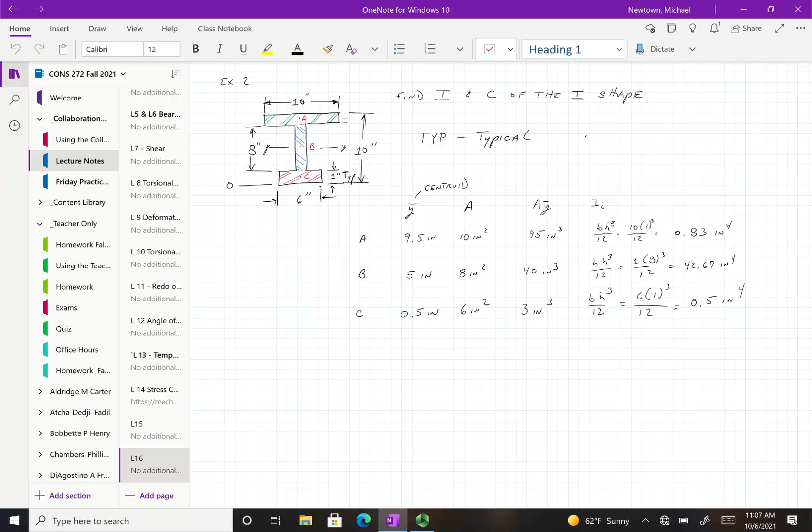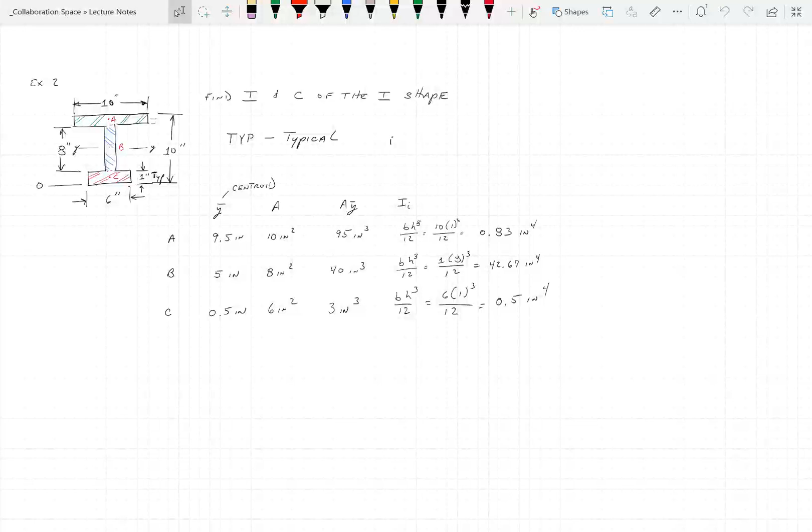All right, I knew there was another column I was missing. We want an A showing up here, A times D squared.

So our area times the distance is actually the height here. What we're looking for is these are the D's, each section here.

That will be the D, okay? Because we're looking for the height of the change from where the centroid is going to be. And we can do this down in the equation, or we can do it up here. Matters not, but it's going to be a little easier because you got your A over here and your D. So it's a matter of taking A, the 10 by 1 is 10, and the height of that whole thing is 1 also.

Okay, did I do that right? I did do that right.

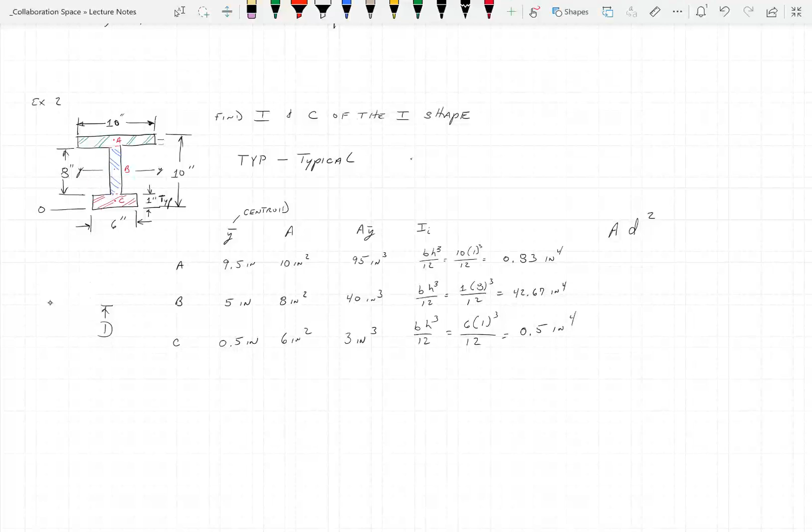No, I'm not doing that right. Okay, let me back up here. Sorry, I'll get my head back in this game and we'll go from where we're supposed to be. The D that I'm looking for is from the, zoom in on this for a minute. Let's try a different color here. Which haven't we used? Let's use blue, we haven't used blue.

So I'm trying to figure out where it is from where our baseline is here, okay? So our D for this one, C, will be D of C will be 0.5 inch, and D of B will be 1 and 4 is 5 inches. And then D of A will be 9.5, yeah, because it's...

Okay? And what that is, it locates the centroid of each object with its area relationship to where the baseline is. Okay, so the bottom is 0, we called it, but we could call it any place else.

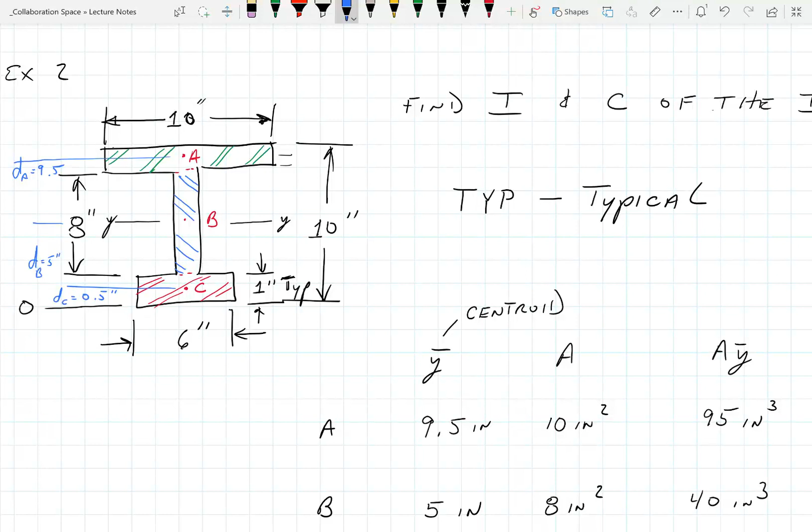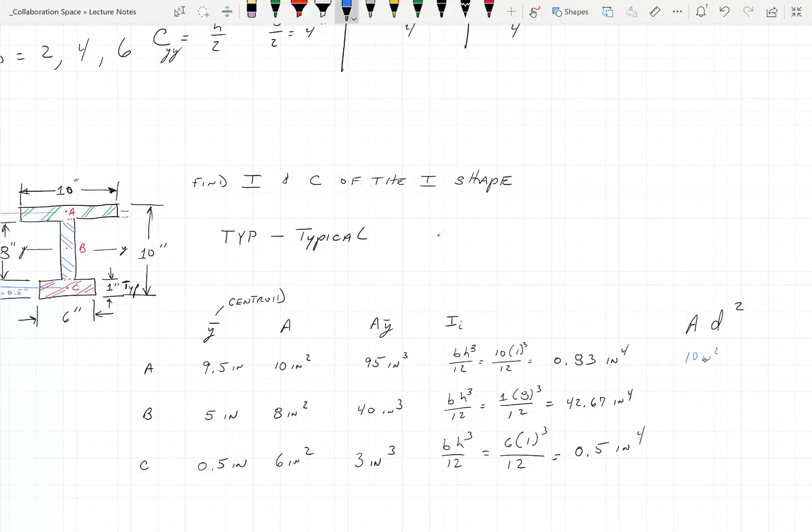All right, now I think we're good. Yes? Okay, so literally over here to this last column, AD squared is now going to be A, which is the top one, was... I'm going to do it mathematically here, so the 10 inches squared, let's write that so you can see it. So 10 inches squared is the area, and I'm multiplying it times 9.5 inches, and I'm squaring that, okay? So it's not 9.5 square inches, it's 9.5 inches squared.

Good, Fadil? Okay, all right, what's that number come out to? The one I got planned for today is a lot simpler than this. Hopefully, I just picked this one out of my hair, but should have known better. Complicated to get.

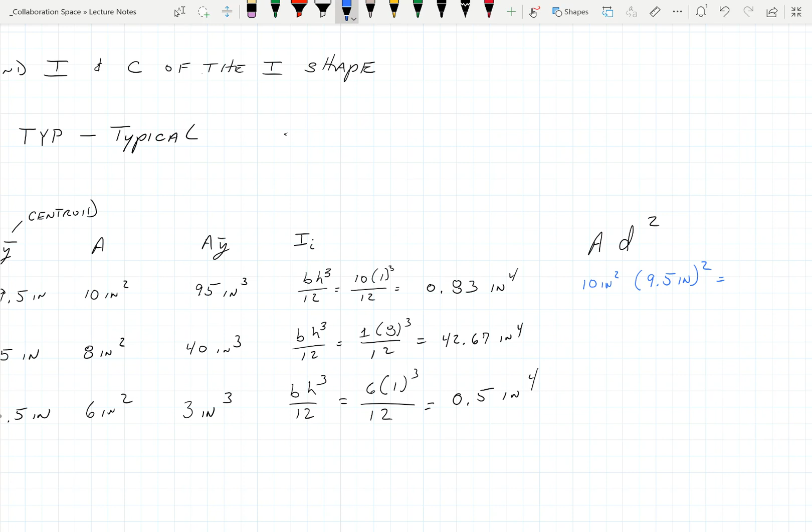Now, 9,025. 9,025 inches to the fourth. 902.5. Yeah, 902.5. I'd like 902.5 better.

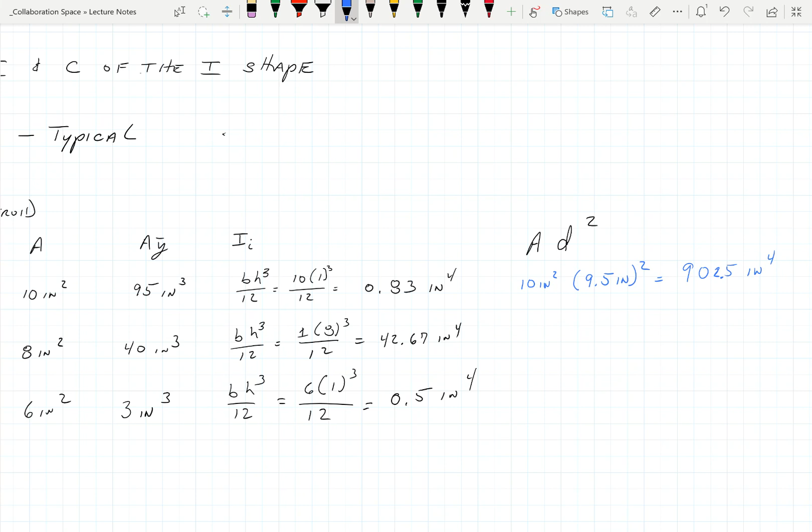Because 10 times, well, 9 would be 81, right? And that'd be, no, it'd be 810. And then you do the 0.5. Did you by chance just miss the 9.5, put it in as 95? I think you put 10 inches squared times 9.5. Yeah, oh, I did that.

So this, when you do this bit, folks, it's important that you keep the areas are already squared, and the D is something you're going to square, because we want it in inches to the fourth. All right, so let's try the next one here.

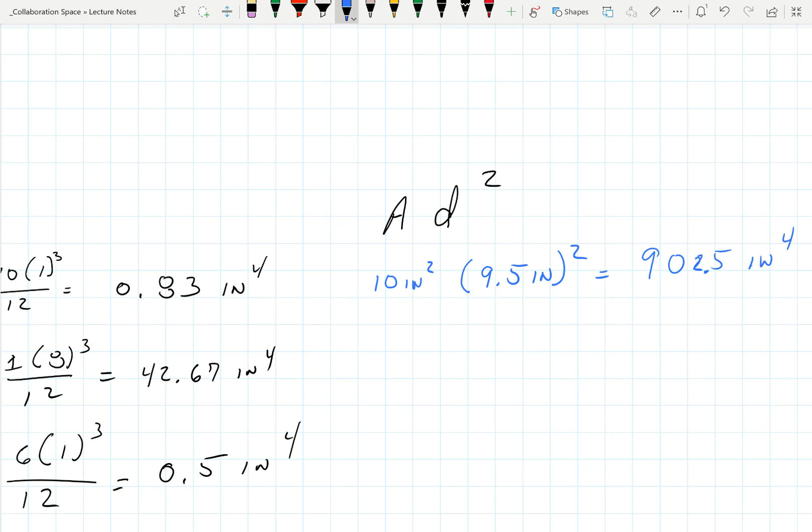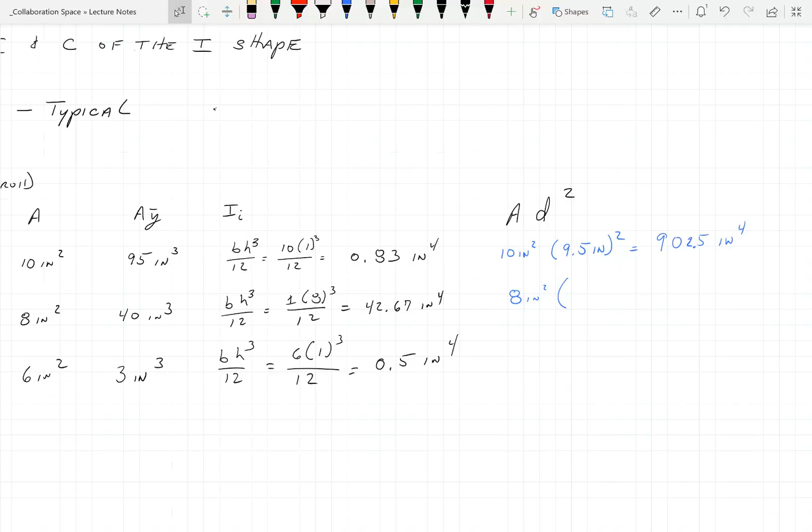So we got 8 inches, inches squared, and this came out to be 5 was the D. And we square that, so 25 times 8. 200.

Okay, and then our area for the bottom was 6, and we were at 0.5 inches squared. 1.5. 1.5? Okay. All right.

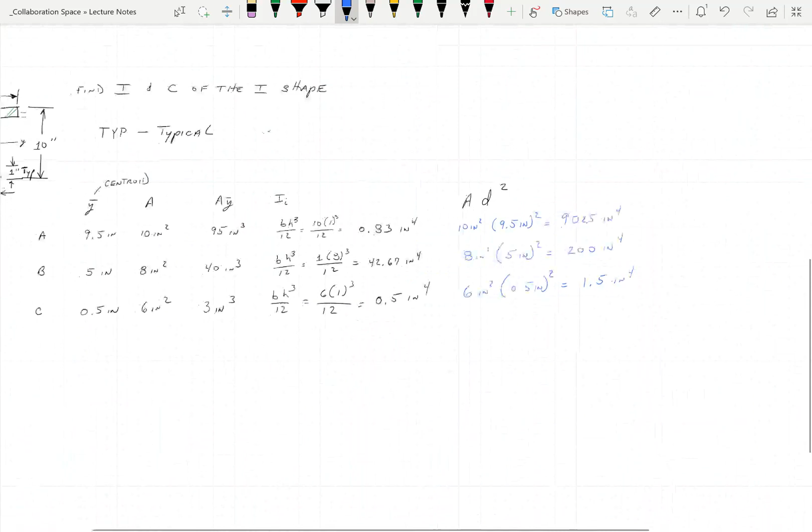Now, I'm doing this with all the places in the table, and I'm going to introduce you to the equation so you don't have to do these last two out this way. So it's your choice, okay? You can always tableize it, or you can just come down the list and do the equations, okay? But what we're looking for here is the I.

Oh, I'm sorry, before we do that, let's find the centroid. Find the centroid. This is the easier one of the two, okay? And this is going to be Y bar O is the label for it. Y bar O is going to be equal to the summation of the A Y bars divided by the summation of the A's. Yep, okay?

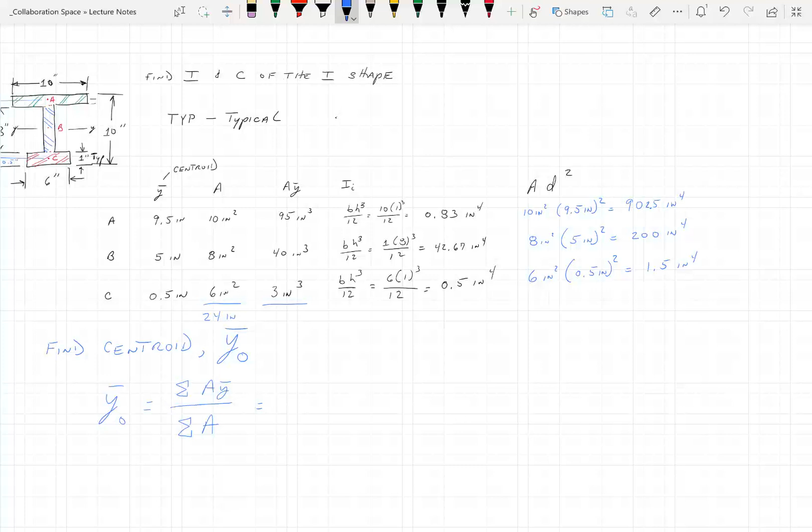And the summation of 95, 40, and 3 is? 138. Everybody agree? Hearing no dissenters, we're moving on.

138 inches cubed divided by 24 inches squared. I'm going to clean that up, make it look like an 8.

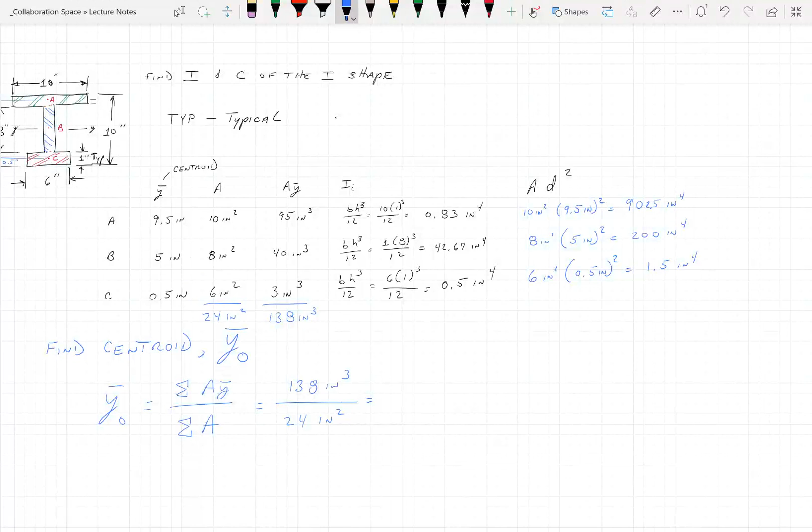What do we got for a number? 5.75 inches. Okay? Everybody good mathematically?

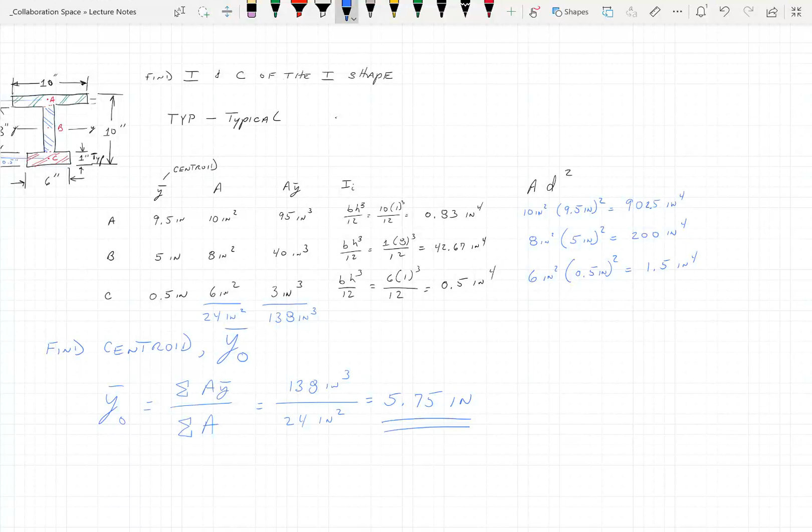Okay, now let me show you where that thing belongs. And I really do think I want a different color here. So let's try — yellow doesn't really work well.

Purple does. So we are 1 inch up here, so there's 1, 4 is 5.

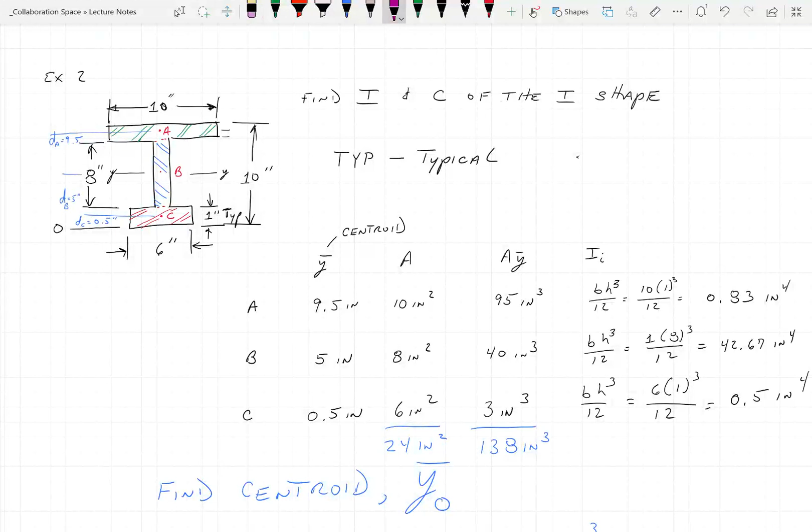But our centroid we just decided was 5.75, so we are literally right there.

Y bar is 5.75 inches. Make sense?

Okay, I want to ask you this to make sure it makes sense. I want you to understand, is it in the right place? What has more mass, the top of this thing or the bottom of this thing?

The top. So the centroid should shift towards the greater mass, right?

Sweet. One of the greatest things in physics — about the only tool I ever remember from physics.

Give or take, is that perfectly balanced? Is that where the centroid is? Yes, because there's all this extra weight out here. Now you take... yes, I know I can use this.

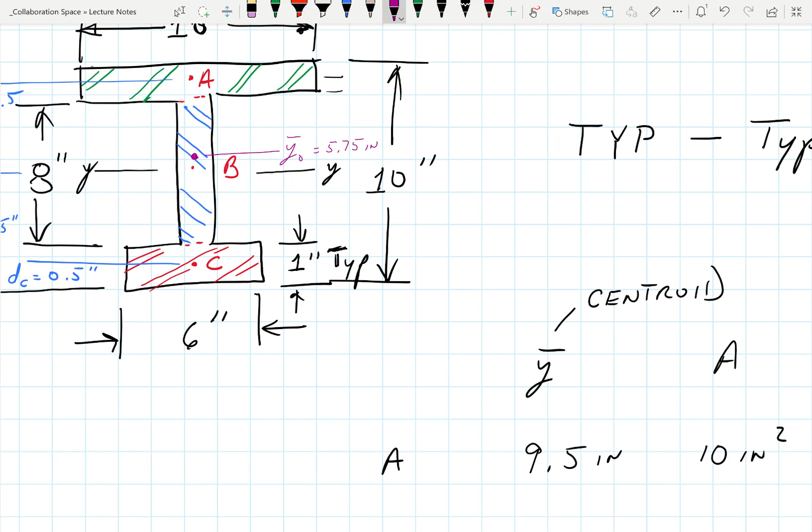All right, so we're in a good position there. We got our Y bar. I'll do it with a pencil.

Wait, so if those are the only two variables we need to find the centroid, why do we need more? Oh, we're not done yet. Well, we're far from done.

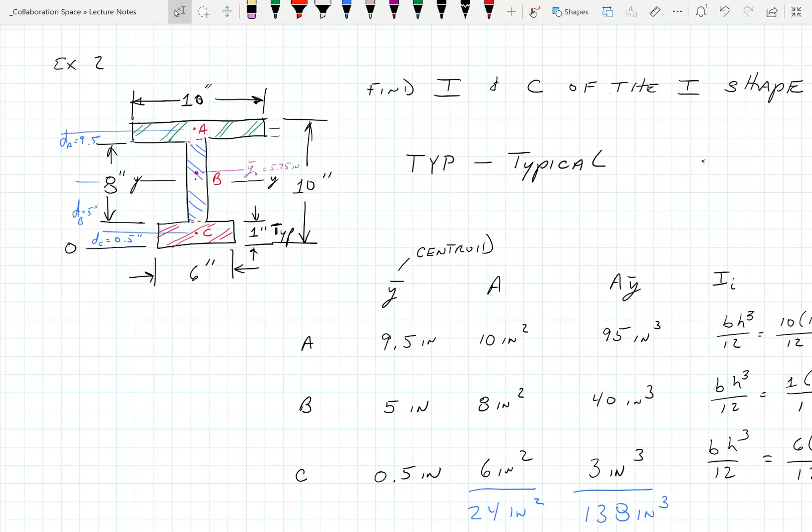So we need to know the summation of the moment of inertia of this thing. Okay? So think about this as a figure skater — you've got one long arm, one short arm.

We know where her centroid is as she spins, right? It's someplace on the right side of her body.

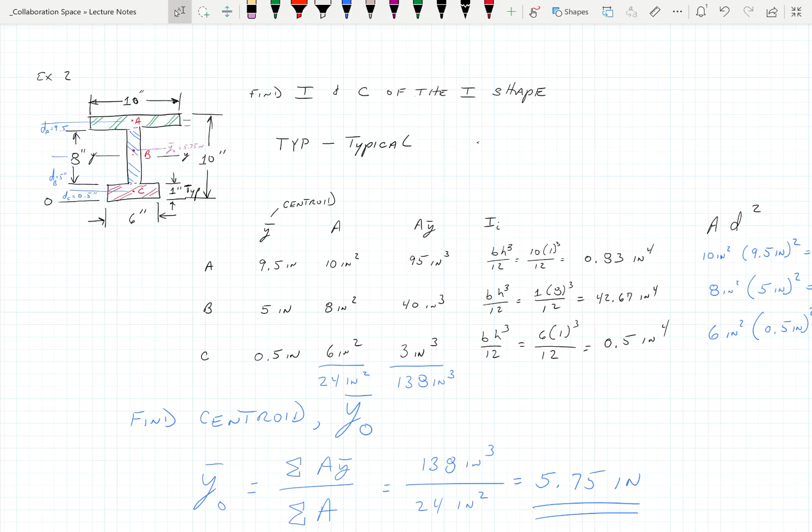What's the moment of inertia going to be? That's what we're looking for next. Now, so it is two sets of different equations here.

So let's do this — actually, I'll do it in purple. Make it bigger. So we can sum up this, and we can sum up that.

Okay, so we can have a summation: I total is equal to the summation of I, the individual, plus the summation of A D squared.

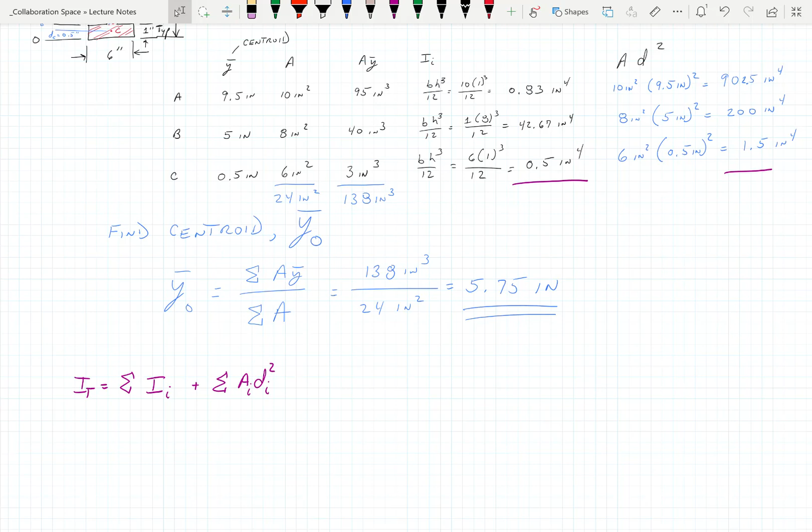Okay, and the reality is, okay, that's great — you can tally that up, right? The other equation that makes everybody's life just a little bit easier is just doing this.

Let's do that so you can actually read it. I1 is equal to the base times height cubed over 12,

plus the A1 D1 squared.

And then I2 equals B2 H2 cubed over 12 plus A2 D2 squared. And then I3 equals

B3 H3 cubed over 12 plus A3 D3 squared. And then IT is equal to I1 plus I2 plus I3. Okay?

You can choose any way you want to do it. I don't have the magic lock on which one's the right answer. The only thing I know from practice is it makes a neater table if you do all the calculations up in the table, down lower in complication, and then just fill the table in. That makes sense? Let me restate that.

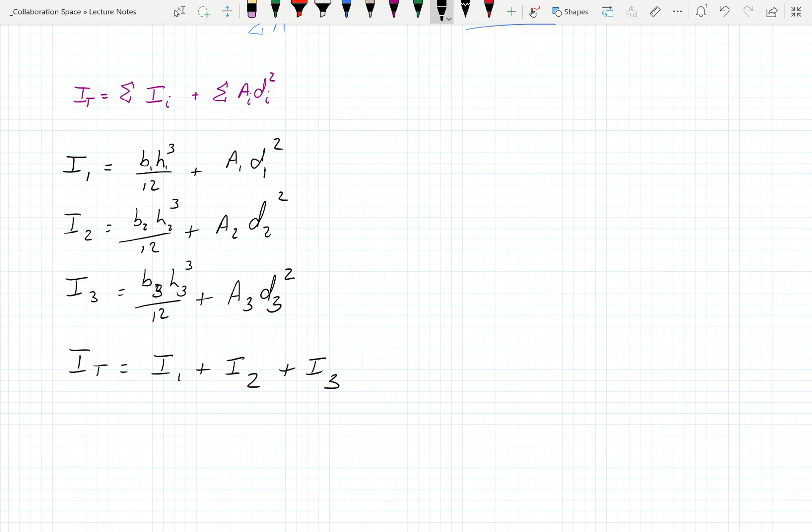So all the stuff that I did up here with this and all of this, you're going to have to show it to me. So it makes sense to do it down at the bottom with the equation. If you want, you can just go back up and fill a table. But truthfully, really what you need is the first 3 columns in order to do this problem. And after that, the rest is just know the equation. All right, I'm going to do the next problem that way.

Let's solve this one. So, the summation of the stuff here, 0.83, 42.67, and 0.5, is...

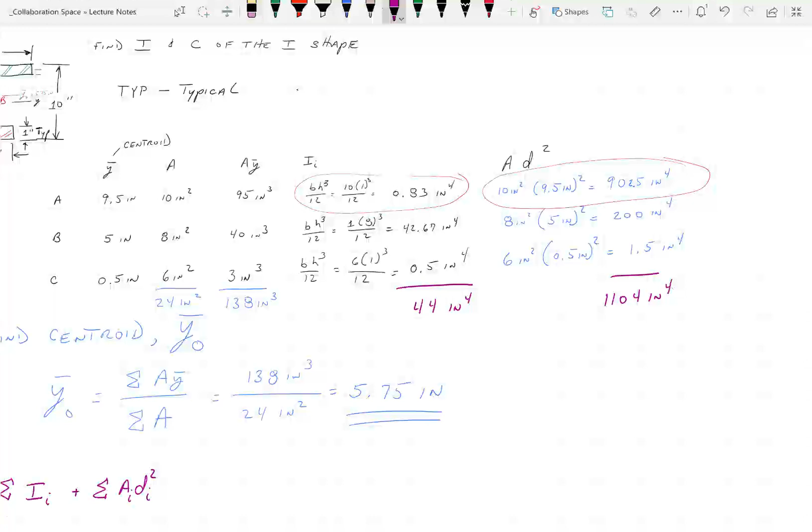Okay, so literally if I come down here to the purple, it should be 44 inches to the 4th plus 1104 inches to the 4th, and we should get 1148, right?

So that's my I. So we know the moment of inertia, and we now know where the centroid of this thing's revolving about. Pretty good? Okay.

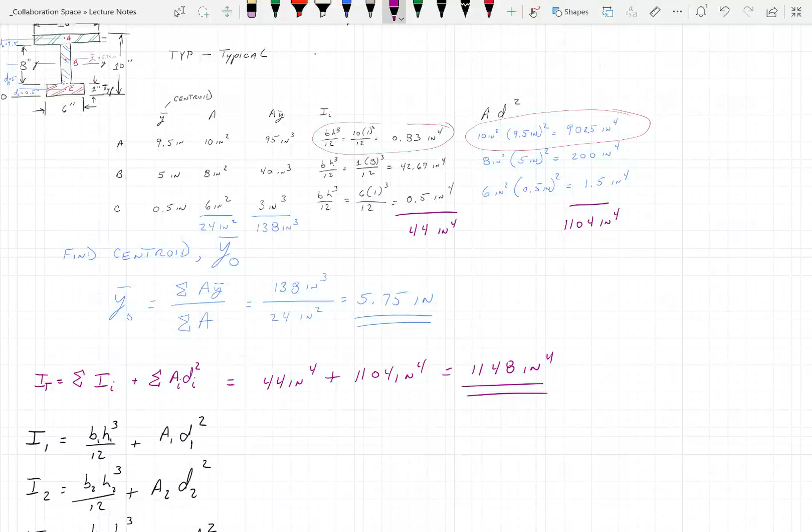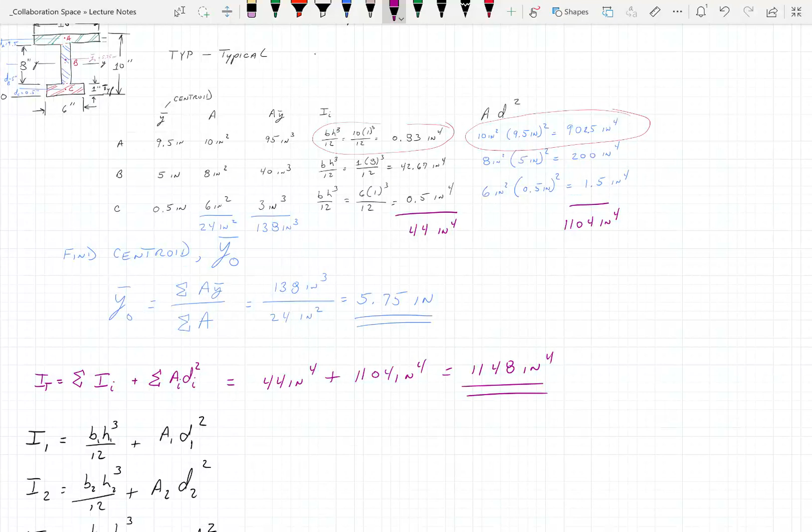There are some great ways to do this with some calculus, but you don't need to. Honestly, most engineers forgot how to do the calculus anyways, and you just do this by hand. Not that you shouldn't forget how to do calculus, but trust me, 10 years out in the field, you're going to go, calculus?

I thought, that's no joke, I was going to put sprinkler heads around the lawn one time for a weird shape. It's like, ooh, I can do this. It's just the integration of the area of the fence line. Yeah, I had to come up with the equation for the fence line first. And I was like, screw that. I'm going to go find the areas of the geometric shapes I can put in the yard, and measure them up and just go that way.

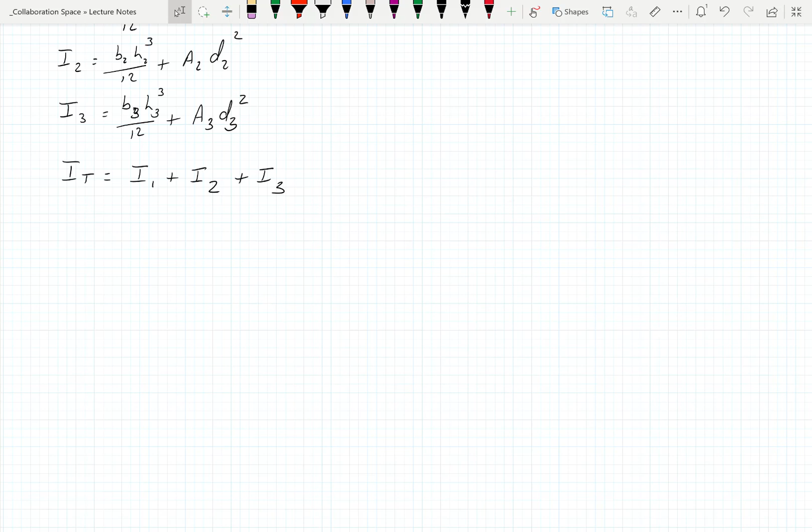All right, everybody good on that? So we got our answer. You can do this method down here and do the summation of each of them that way. Perfectly fine, I don't care, whatever works for you. But literally, just keep your answers in the table. Make your life a little cleaner and neater.

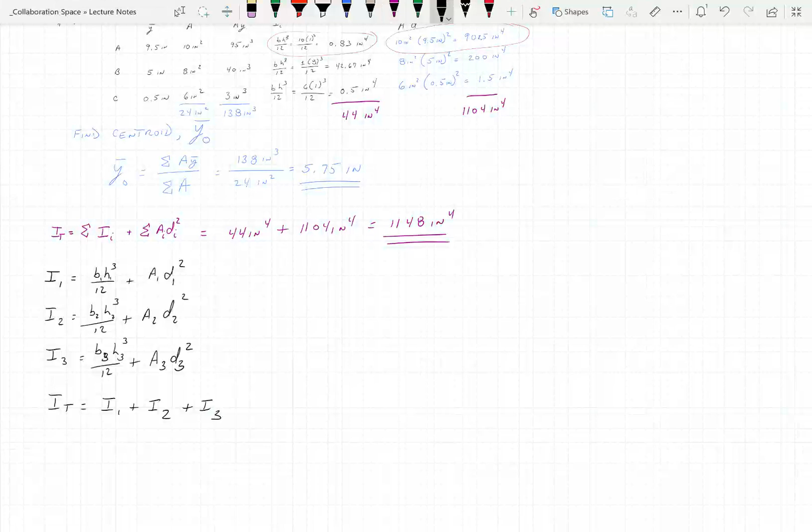Okay, all right, let's do another one. Actually this one I think you guys can try to do together, it's not like we're cheating anybody here. All right, this is L17 today. Wow, 17 days into the class. All right, so here's this problem.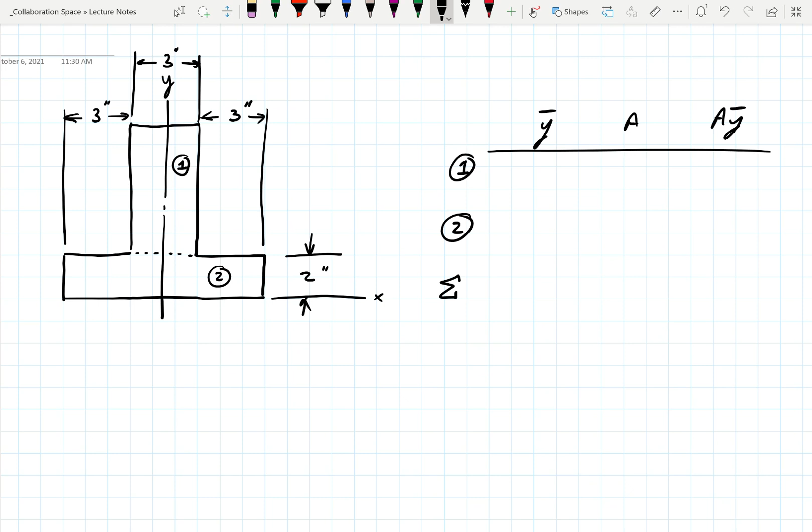Okay, so table. We got part 1, which was... come on, yeah, this one up here is going to be part 1. This one will be part 2. So I'm going to draw a little dashed line across there to separate them. And we're literally going 1, 2, summation, and we're going to look for our Y, and we're going to look for our A, and then we're going to look for AY, don't do the O there. Okay, and we're going to fill in the table.

All right, so what's the area of 1? Oh, we need another dimension here. Sorry, that would be helpful, wouldn't it? So 6 inches there, 2 inches high on the bottom, 3 inches, and we're good.

All right, Y bar for 1. First thing you gotta ask yourself is what? Where are we gonna rotate about? What's our 0 gonna be? Okay. Yes? I gave it to you, probably. Put X on the base. But you can pick X.

You could pick X if you wanted to. You could put an X right there and not use this X. All right? And that's perfectly fine too. You get to choose where you're going to rotate about. Okay? Problem is this bottom starts with a bunch of negative numbers then. Okay? So it's always easier to choose something where you know you got some solid idea where you are in space, right?

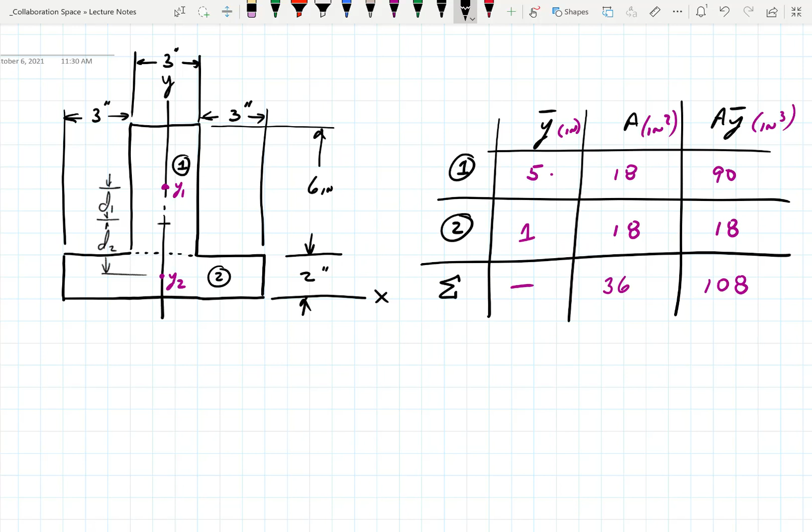I'll do this one out for you, and we'll try it again, okay? Let me put the answer up, and then we can go from there.

So everybody got this part right, which was 108 inches cubed over 36 inches squared. Turned out to be 3 inches. Okay? So that's where this is.

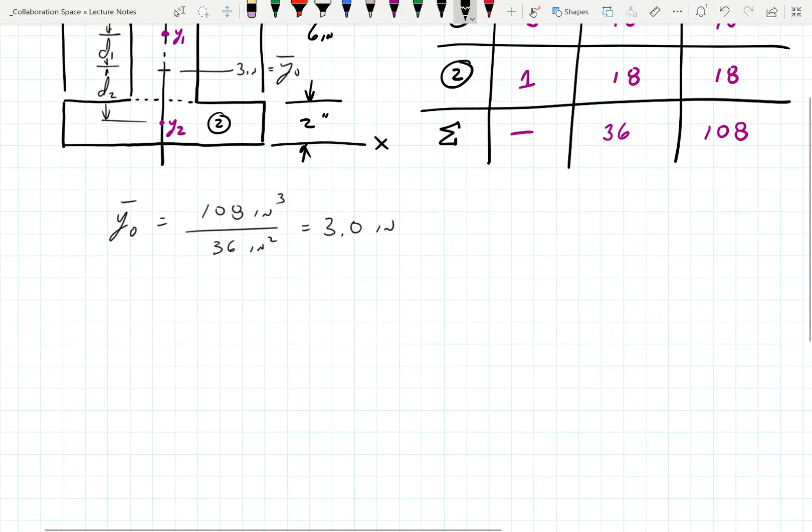Equals Y0. Okay? From there up to there, D1 is 2. From there down, D2 is 2. Okay? So when I go do this, I is equal to base times height cubed over 12 plus A D1, and I'm going to square D. We're going to get

126 inches to the fourth, and I2 will be base 2, H2 cubed over 12 plus A2 D2 squared, and that answer will come out to be 78 inches to the fourth. And that means I total is equal to I1 plus I2.

Okay? And that should be 204 inches to the fourth. And that's our answer. So we need 3 inches and we need that. Write that down. I'll let you go. We'll spend some more time on this. Don't worry about the quiz.

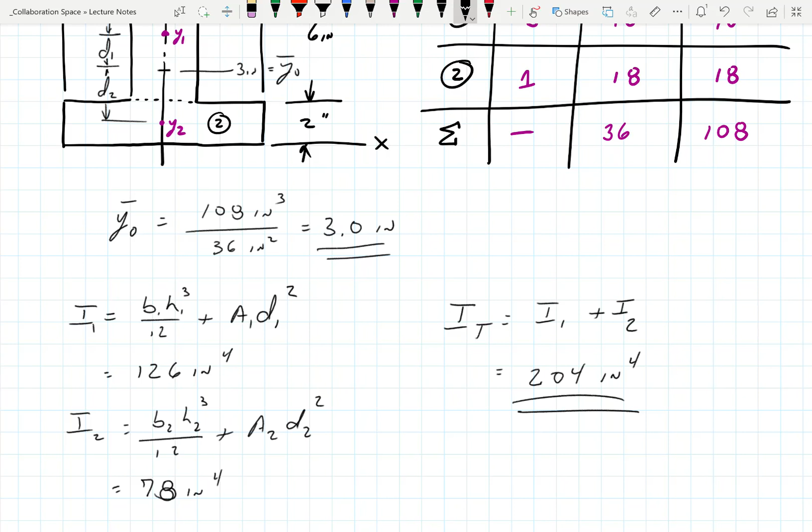But it did tell me what I needed. You guys are lost, which is acceptable, okay? Because if this is not the easiest part of this whole class, this part is the tricky part that will get you and fight you on a regular basis. So we'll do some more of these on Friday. Yeah, Friday I will give you some homework for these, but we'll spend 2 hours just cranking these out, okay? And maybe by the end of that you'll get them done. And maybe I'll give you a quiz at the end of that. So you can go into your book and do some reading on this though. Cool. Everybody have a great day.